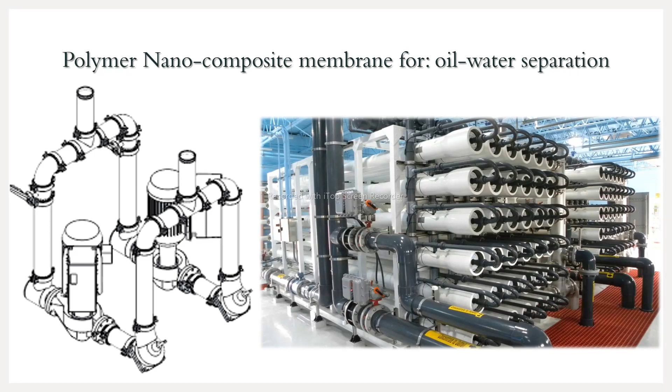The topic of my research is polymer nanocomposite membrane for oil-water separation. The commercially available membrane trains consist of three stages or more than that. As we go from one stage to the other, the quality of the permeate or quality of the concentrate, depending on our focus, gets increased, and each of these stages consists of several modules. These types of setups are well established industrial setups for applications like desalination, fruit juice concentration in

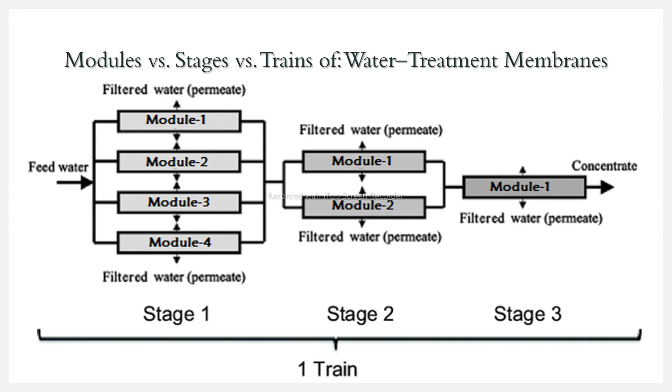food industries, etc. But for oil-water separation, membranes are still in the developmental phase. So that's why these types of large scale installations are not there or very rare. They are not commercially or industrially available in the market. So our end goal is ultimately to develop membranes in such a way that they can be applied in large scale industries for de-oiling.

So why is it necessary? Because offshore there are oil spills, and onshore industrial effluent may contain oil. After the oily water is discharged into natural water bodies, the oil gets spread on the surface. It prevents the mixing of oxygen from the air into the water, which endangers aquatic life.

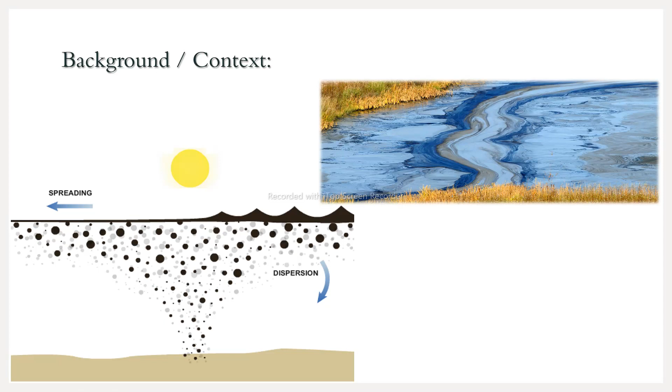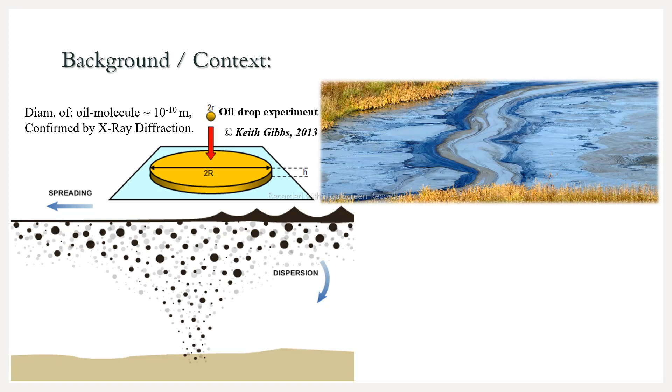There is one experiment called the oil drop experiment. Based on this experiment, the diameter of an oil molecule is found to be around the angstrom range, which was also confirmed by XRD studies for different oils. But the oil droplets are much bigger than that, 0.5 to 200 micrometers in diameter.

The conventional de-oiling devices or oil skimmers are able to remove the oil from the surface, but the oils that are fine in size, as per Stokes law, cannot easily rise up to the surface, so they cannot easily be separated. Those are called dispersed oil.

There are environmental rules and regulations. As per the 1986 environmental protection rules, for offshore discharge the oil content must be less than 40 ppm in the water, and for onshore discharge, like liquid effluent from industries, the oil and grease content must be less than 10 ppm without dilution. So we can see that the oil molecule is around the angstrom range, and the oil droplet ranges between 0.5 to 200 micrometers, let's say, in diameter.

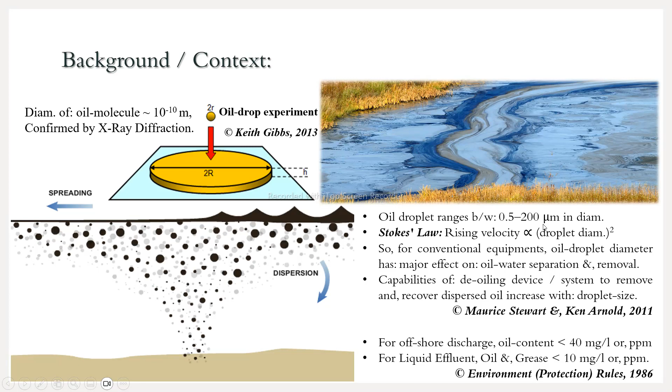So the conventional membrane modules available in the market are either MF, UF, NF or RO modules, which we all know basically. The minimum pore size that a membrane can have is the RO membrane, whose pore size varies from 0.1 to 1 nanometer. But the oil molecule is in the angstrom range, so it is even smaller than that. An oil droplet consists of several oil molecules, and each of them can easily pass through even an RO membrane.

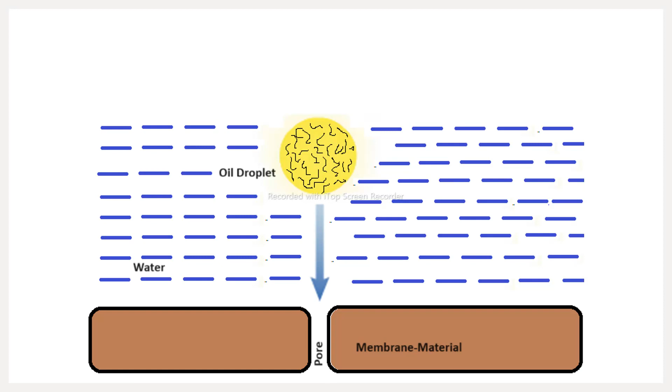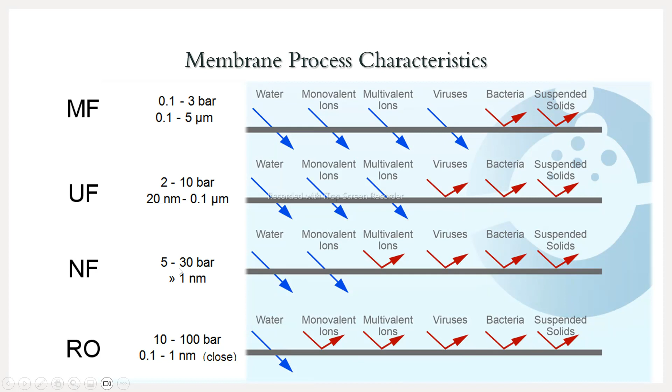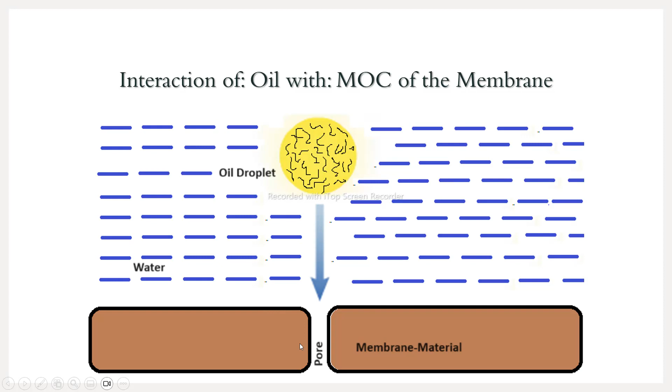But the interaction of oil molecules with the material of the membrane is important, because we generally use membranes ranging from UF to NF for oil-water separation. So how does it separate oils? Actually, the membrane material is such that it repels the oil molecules and the oil droplet, and prevents it from breaking into further finer droplets. That's how it is able to separate the oil from the water. So that's why the choice of polymeric base material is very important.

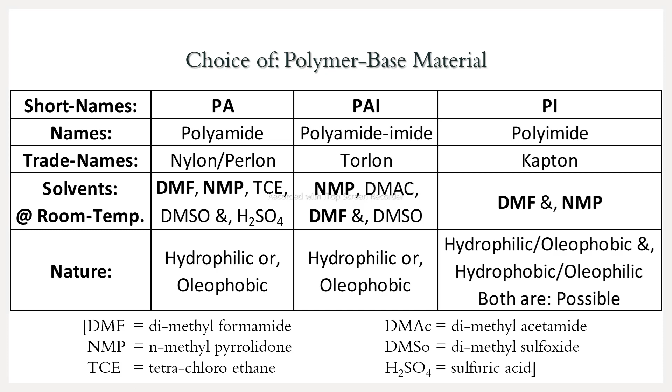We have chosen three basic polymers for our study: polyamide, polyamide imide, and polyimide. Their trade names are given. There are many solvents which can dissolve these three polymers at room temperature, but the common ones among the three are DMF, or dimethyl formamide, and NMP, N-methyl pyrrolidone. PA and PAI are hydrophilic or oleophobic in nature, and PI can be either hydrophobic or hydrophilic depending on the alkyl groups present in the PI.

So what are the chemical structures of the chosen polymers? They are basically PA, PAI, and PI. Mainly there are two groups: one is the amide group and the other is the imide group. The amide group looks something like this. There is one C double bond O group, and the polymer that forms out of this. There are many polymers, but the most popular ones are PA66 and PA6, respectively called nylon and perlon. Those are their trade names.

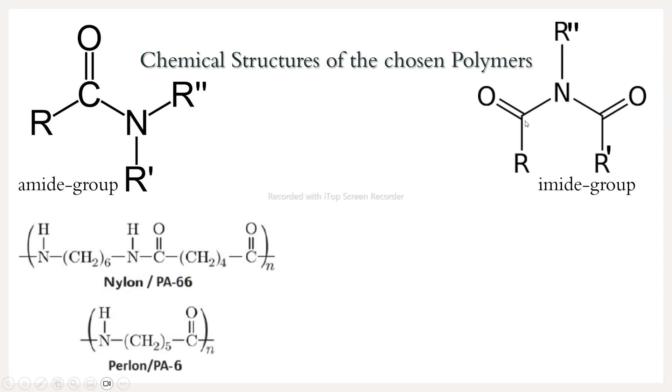And the imide group looks something like this. There are two C double bond O's, and many structures of polyimides are possible depending on the nature of the alkyl groups R prime and R double prime. But in the case of polyamide imide, both the imide group and the amide group must be present in the chemical structure.

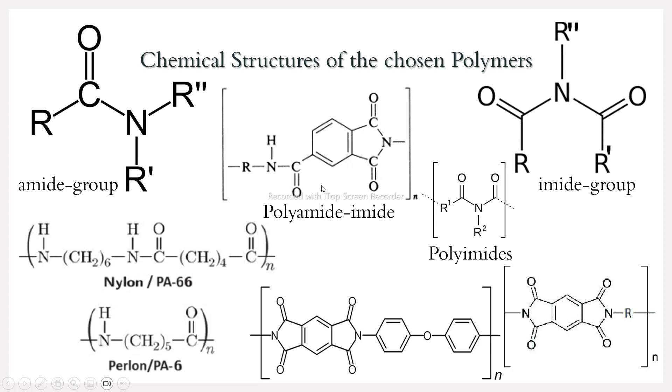Now comes the membrane fabrication section. Here we will discuss mainly three membrane fabrication techniques which are available in our lab. The first one is solution casted flat sheet membranes. The solution casting method consists of first mixing the polymer inside the solvent, then it is casted on a solid support. After that, either by evaporation or inside the water baths, the solvent is removed and pores are formed inside the polymer membrane matrix.

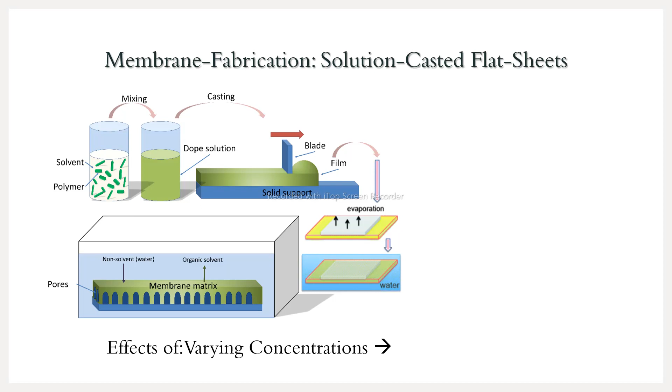So depending on varying concentration of the polymer inside the casting solution, the pore nature may vary. That means the number of pores, that is porosity, will decrease as we increase the concentration of the polymer inside the solvent. The homogeneity will decrease. Like that, the nature and number of the pores will vary depending on the concentration of the polymer inside the solvent.

Another method that is present in our lab is electrospun fibers. Both vertical and horizontal electrospinning are available in our lab. So how is it done? There are syringes, and inside them the polymer is loaded. Those are called syringe pumps. The polymer comes to the tip of the syringe as a droplet, and then the voltage is applied, and the droplet takes a conical shape, which is called the Taylor cone.

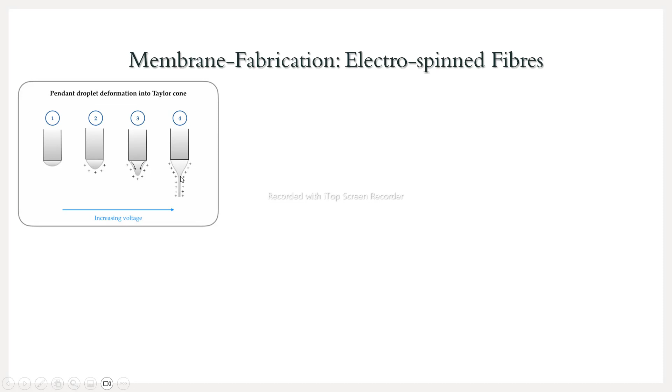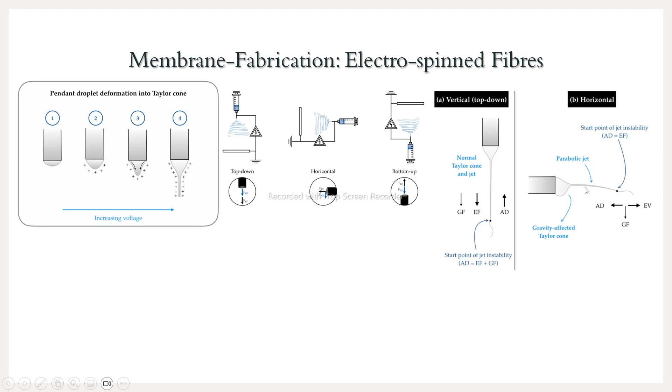As we increase the voltage, at a certain point the fibers start emerging from the tip of the Taylor cone, and they get deposited on a metal plate. The entire apparatus may be either in horizontal or in vertical condition. In the horizontal condition, the Taylor cone gets distorted by gravity, because gravity acts in a perpendicular direction with respect to either the aerodynamic drag or the electric force.

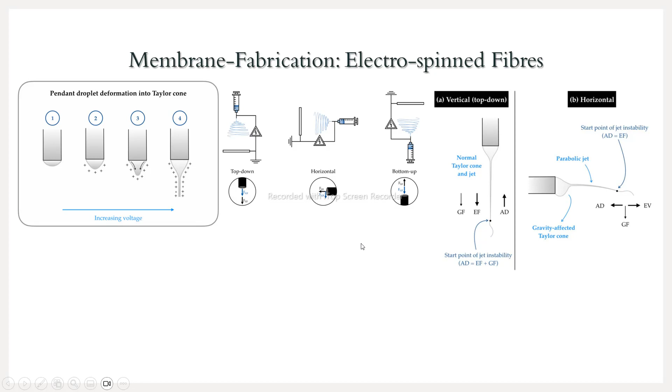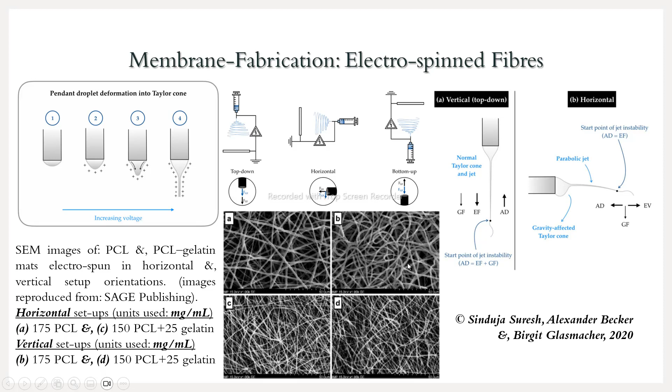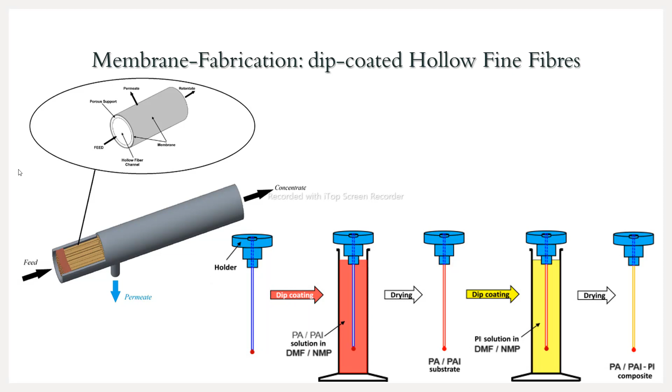Okay, and the third membrane fabrication setup is the dip coating method for producing hollow fiber membranes. In hollow fiber membranes, from the feed to the permeate side, the flow may either be inside out or outside in. After stacking the hollow fibers inside the setup, that is the module, it looks just like a shell and tube heat exchanger.

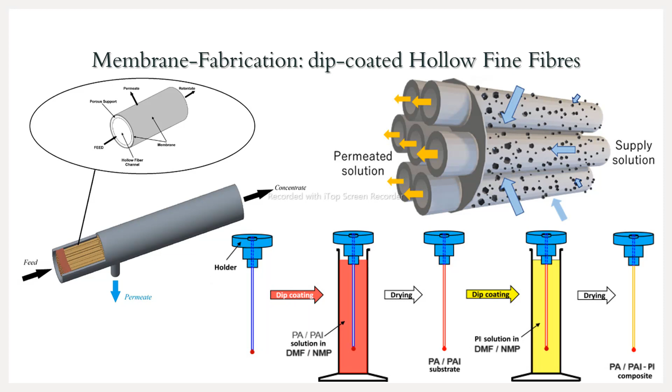So these are the three setups that are available, and we are planning to incorporate several nanomaterials in the polymers. Depending on the nature of the nanoparticles and based on the literature search, many types of nanoparticles are possible. One is nanochannel providers, for example carbon nanotubes or graphene quantum dots. They increase the water permeability of the membranes because of their nanochannels.

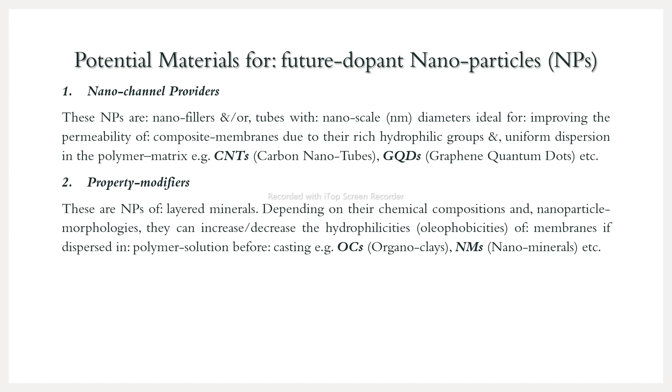There are property modifiers, for example organoclays or nano-minerals. They are layered minerals, and they can increase or decrease the hydrophilicity or oleophobicity of the membrane if dispersed in the polymer solution before casting. The third type is surface modifiers, like silver phosphate or silver nanoparticles. They can modify the surface property of the membrane in such a way that they delay or prevent colloidal particle or microbial attachment. That's why they can prevent or delay the fouling of the membrane.

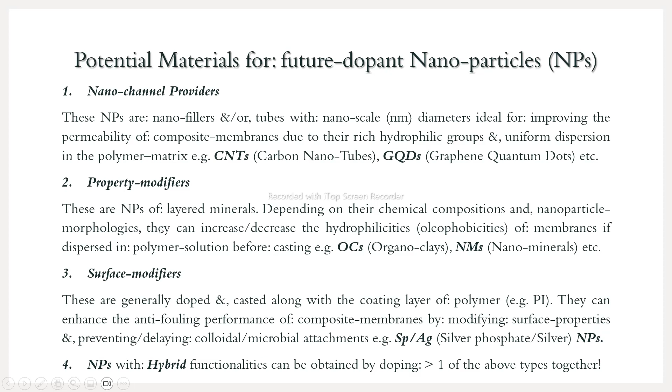So these are potential surface modifiers, potential nanoparticles which can be used. And the fourth one is the hybrid one: of the nanochannel providers, property modifiers and surface modifiers, if more than one of them are used together, they are called hybrid nanoparticles. It will have the functionalities of both types of nanoparticles used in the hybrid.

Okay, so that's all. There are some recent achievements from my side. I did an India Connect research internship for 3 months this year at Nanyang Technological University, Singapore, where I worked on two projects. One is carbon dioxide compression thermodynamics, and another one is combustion of ammonia. Before and after that, I attended two workshops, one in IIT Bombay and another one in Bhabha Atomic Research Center, Mumbai.